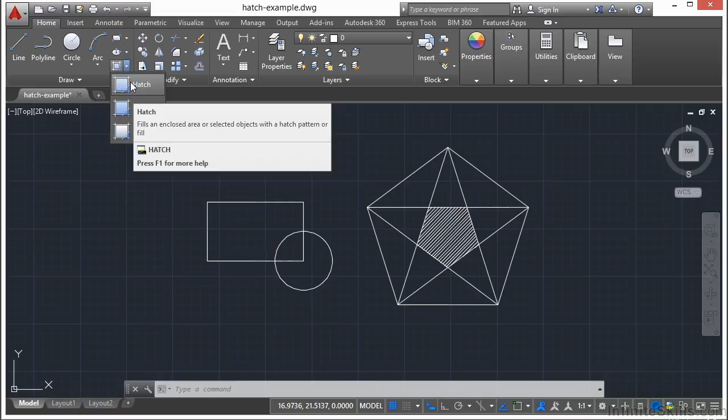Type in the word hatch, type in the letter H, go to the Home tab on the ribbon, and come up to the hatch command right here. Now you'll see here there's a little arrow. And we have three different types of hatches. We have hatch, gradient, and then we have a boundary. Now the boundary doesn't create a hatch, it just creates a boundary that's very similar to a hatch boundary. And they're created almost identical. So that's why it's grouped here.

If you click the hatch command, this will give you a contextual ribbon tab. This is the hatch creation ribbon tab. Here you can pick your different patterns. You can see them on the screen here. You can scroll through them. If you click that arrow here, that shows you everything that's available to you. You get to some of your gradient fills and other patterns. Some of these are ANSI or ISO standards. Others are typical drafting standard type hatch patterns that show material, etc. And you also have a solid fill pattern here as well.

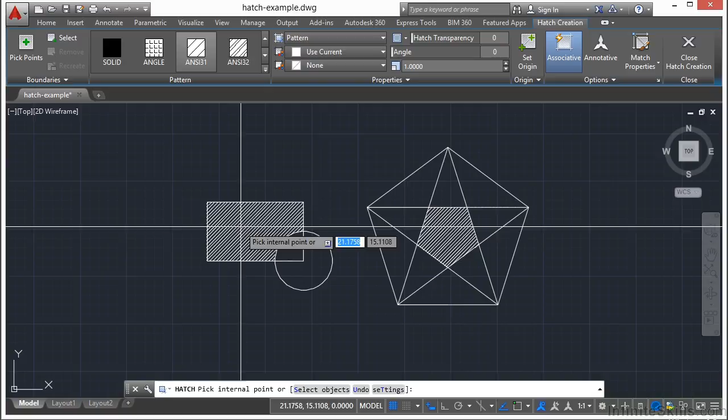So you pick your pattern and you can define what area gets hatched in one of two ways. One, you just pick your points and it looks for a boundary and it fills everything inside that boundary. As you move your cursor over one of these areas, it will give you a preview of what's going to be hatched and what it's going to look like. Or you can use the select option and select the entire rectangle.

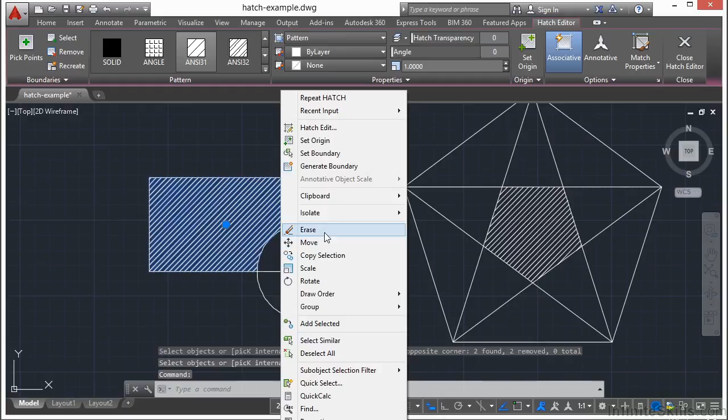And you see here, it automatically created this with island detection because I started it and went back to it and continued with it, and it thought I was giving it multiple options. So if I press escape, select the hatch, right click, and erase that, I'll show you how it's going to look. Start the hatch command. Start with the select option and pick the rectangle. It will ignore the lines inside there. Otherwise, if you use the pick points, it has what's called island detection. So it's sort of dropping in a drop of water and it just flows around until it finds a border and then it stops.

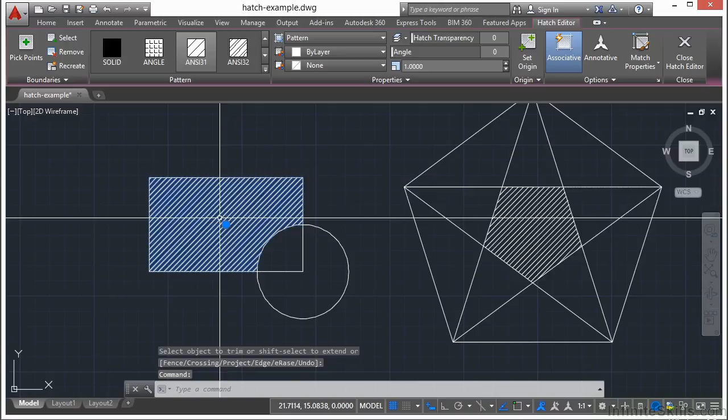Now hatches are cool because I can edit them in a lot of different ways. I can trim them: start the trim command, select the cutting edge that you're going to use, press enter, and then select the part of the hatch that you want to go away. That's really cool. Also, if I select the hatch, I can move them like so. And you can see here I have grips that I can also change the boundaries just like I would with a polyline. So I have a lot of different options.

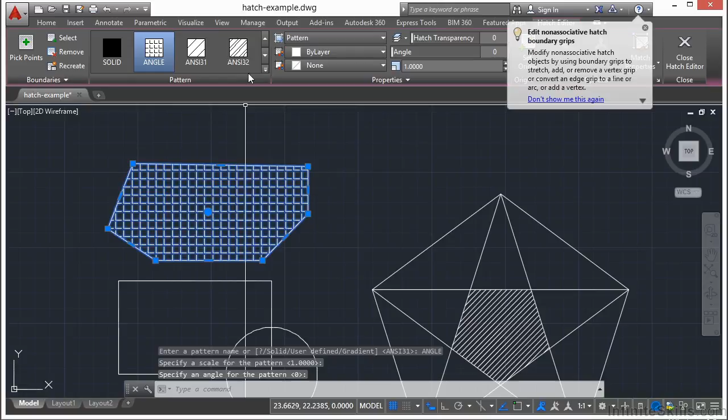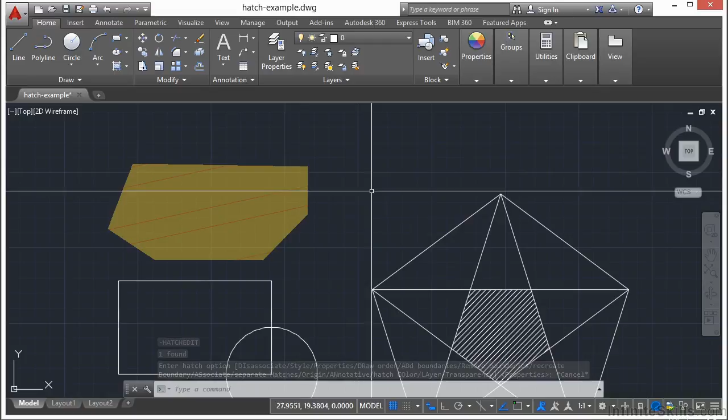If I select a hatch object, the contextual ribbon tab of the hatch editor will come up. It looks almost identical to the hatch creation. Here I can change my patterns. I can even change it here as well to a solid, a gradient, or a user defined. I can change my colors. I can change a background color. I can change the angle. I have the slider bar, or I can just type in the angle here. I can make the hatch a little transparent. And I can change the scale. When you're done, press escape. If you press enter, you're going to get that little menu bar and just press escape. So you can see here, you can make your hatch patterns look really quite cool.

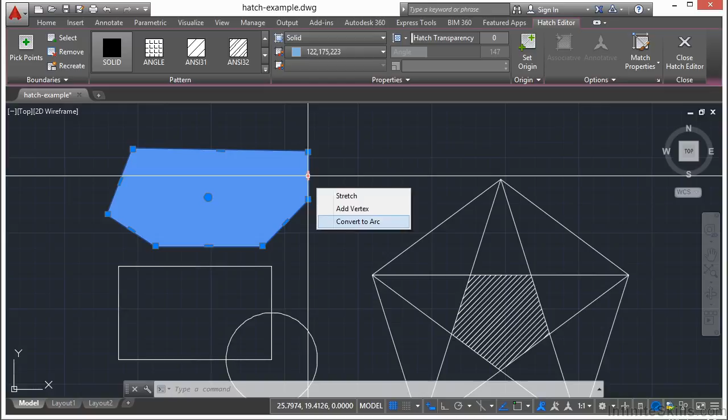Now, if I select this here, and I change it from a pattern and I go to a solid, it will retain some of these other settings, but then I can just change the color to whatever it is I want it to be. And again, the sides and everything just edit the exact same way. If I switch it to a gradient fill, I have these different options here. And I can change the color of my gradient. I can change the different styles of gradients. And there's a lot that I can do with that. I can change the origin.

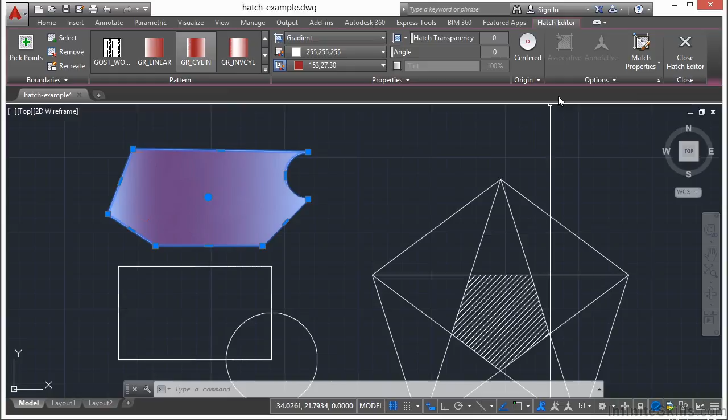And I can use a match properties. If I choose the match properties option, find another hatch pattern, select it, my new hatch pattern that I'm creating or editing will match the exact same properties of that hatch object itself.

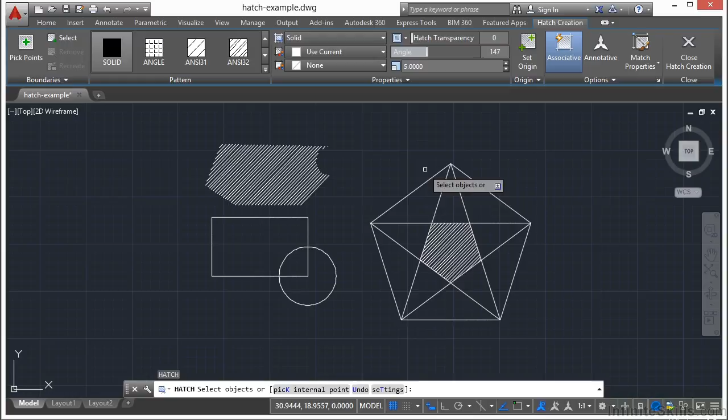So if I go with the hatch command and I pick select, I can select an entire border like that, or I can select a defined shape of items. Now, it's going to give you some trouble if those shapes don't break and cut exactly to themselves, as you can see here. So now that I have those lines, and I start my hatch command, I can pick these very specific lines and hatch just that object or item that way.

So how a hatch object is created depends on what you select, or if you just pick an internal point. Look out for island detection, that sort of thing. So hatches are really cool. They can really enhance your drawing visually, and there's a lot that you can do with them to edit them and to make them just amazing.